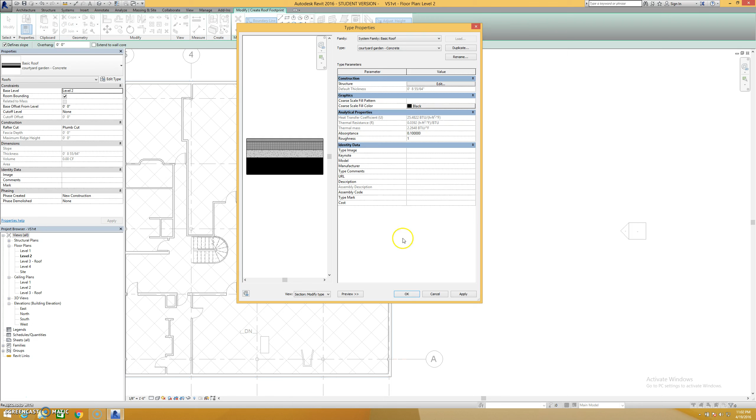We've got some analytical properties here that are in this roof, which is fantastic. And then what I'm going to do is draw in here with a sketch line, but you can also use the pick lines tool or the pick walls tool. I'm just going to do a boring rectangle here, and let's align that with my align tool.

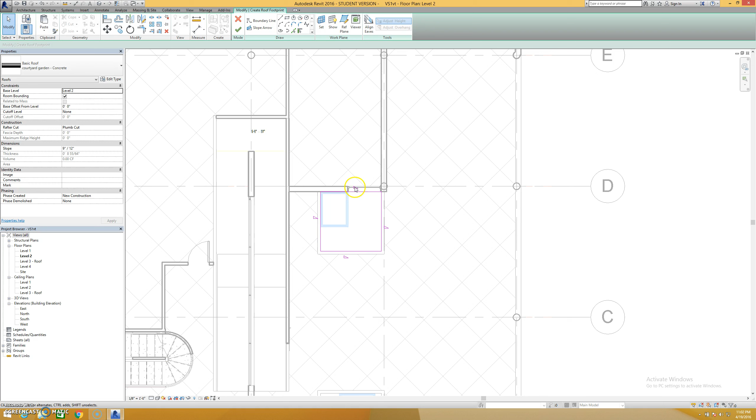Of course, you always want to pick the thing that is your datum and then pick the thing you want to align to it. So if I'm aligning something to a wall, I want to choose the wall first and then choose that object. Now you'll notice that unlike floors, when I draw these sketches, you get these little triangles on each side, and those triangles are definitions of slope.

Okay, so if I hit OK on this already, it's going to make a roof that looks kind of like a pyramid. Yeah, there it is. And we don't really want to do that. We want this to be a flat roof because there's actually a skylight that's going to go in it. You can kind of see it vaguely here in my CAD thing.

So what I'm going to do is select these lines, and when I select them, there will be an option that comes up here. Select the line itself that says define slope, and I can uncheck that box for each of these. Once I hit that, we'll go ahead and see the flat roof.

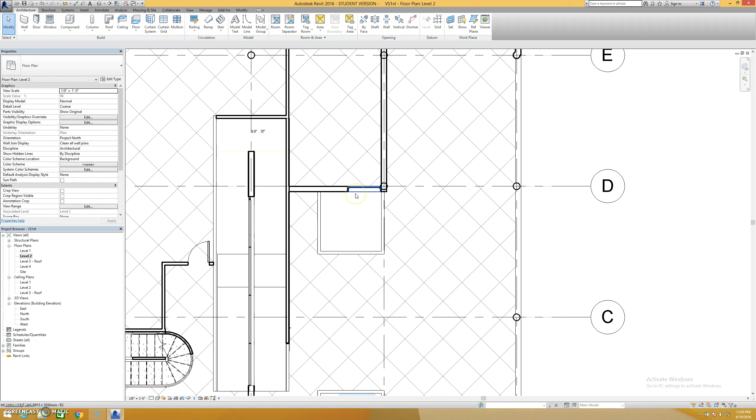Now, if I go back to my level 2 plan, the easy way to handle this at this point is to select this roof, hit CC, which is to copy it, choose a base point, move this roof down to the next area, hit edit footprint, and then I will use my align tool again to just align these pieces together. Quick way to make multiple roofs the same height. It's a very, very simple roof.

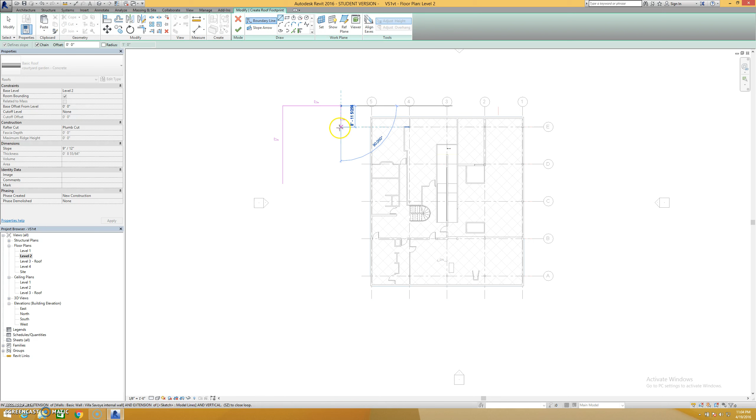Alright, so off to the side, now I'm going to do a different roof. The first thing I want to do is kind of a more complex roof, just with the roof by footprint. So I'm going to go ahead and draw a few different lines, put a jog in this, maybe something like that. This is the least realistic roof I've ever drawn, but I'm going to hit OK on this, and let me just take a look at it while we're working here.

So here is our roof. You can see it's being trimmed in this plan because the slope on it is so high that it's actually being cut off by the view range of this view. But what I can do at this point is go back in and change which items have a slope, or I can change the slope for all of these lines.

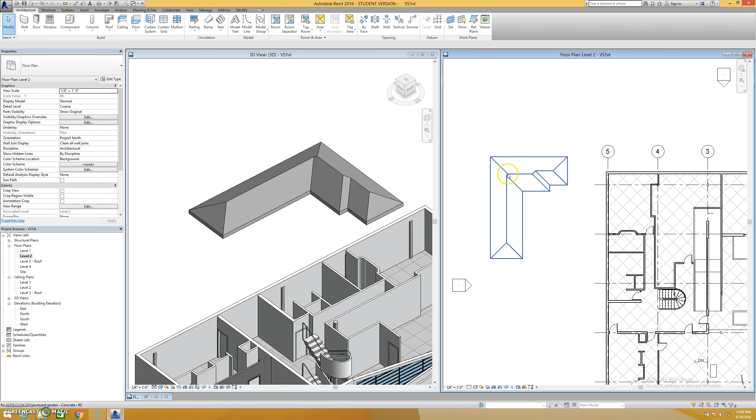So you can see here that even if I select all of them, if this is a 9:12 and I want to change this to a 6:12, for instance, I can change those all at once and get a slightly more modest slope to my roof. Now, how these roof lines are created is completely automatic, as you can tell, like where the ridge lines occur and things like that.

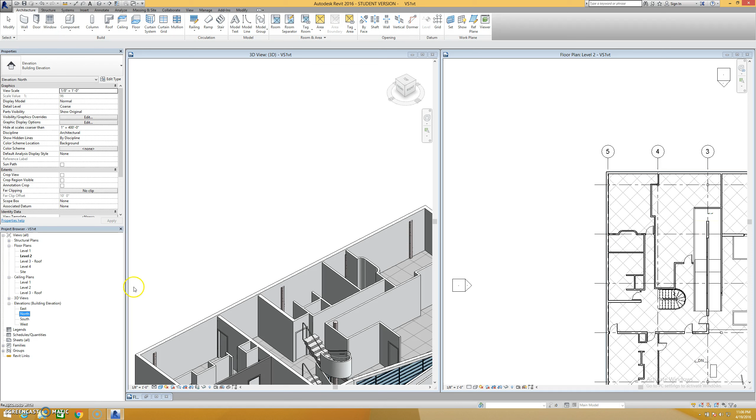So this is kind of an automatic situation. So let's go ahead and delete that one. Let's look at roof by extrusion. So in order to do this, I'm going to go ahead and look at an elevation here. So I've got some walls and things peeking up here. We got that railing, rogue railing happening over here. Ignore that for now. So let's go to roof by extrusion.

And the very first thing it's going to do is ask you to pick a work plane. Now, I should have a video that's just about work planes. But basically, this is a three-dimensional model, and if you were standing looking down at this model from the top, I'm seeing either the X or Y direction here, and I'm seeing the Z direction here as it comes up out of the ground. I can't see the directions coming out of the screen toward us, and that's

infinite. So what this work plane is asking us to do is pick a point front to back from where we sit looking at our screen back through the depth of this project. It needs somewhere to be able to start this extrusion. It can't just arbitrarily pick it. So I have the option to choose any of my grid lines here. I would obviously want to pick one that runs parallel to this view, so an ABCD grid line.

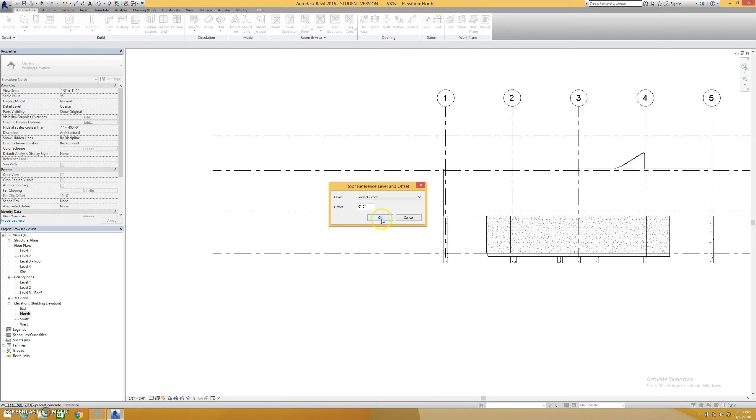The other thing I can do, if it doesn't particularly matter, or I can move the piece around later, is I can choose pick a plane. If I choose pick a plane, I can choose, for instance, the broad side. I just keep tabbing to the broad side of this wall face. And this is going to allow me to start my roof line at the very edge of where this wall starts. Now I have to choose what reference level it's going to use. So go ahead and pick 3 for fun, and then I have a sketch now. So you can see this is giving me a reference line for where my roof is supposed to begin.

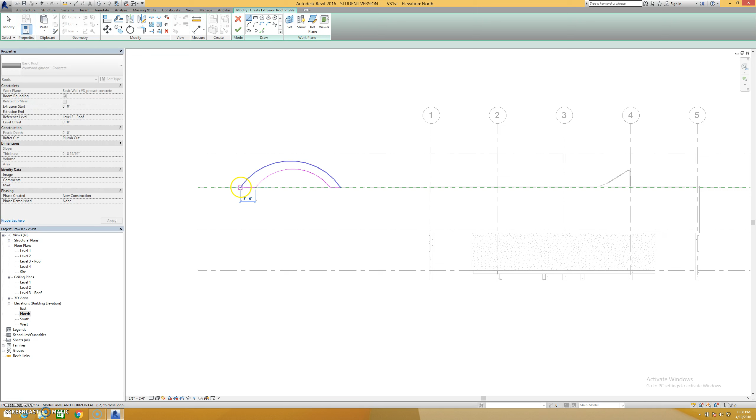And I can make a really stupid little roof here. My favorite thing when I'm teaching my class is making these absolutely ludicrous, ugly buildings, just to show the maximum level of ridiculousness. Well, it says the extrusion sketch must be open. Oh, because the roof's thickness is defined in its type. Okay, I haven't used this tool in a while, and this has changed a little bit, but this is fantastic. So essentially all you have to do is draw a line that's going to define your roof.

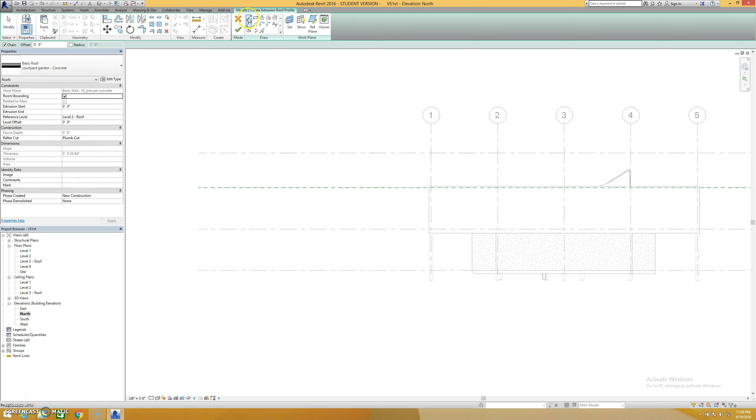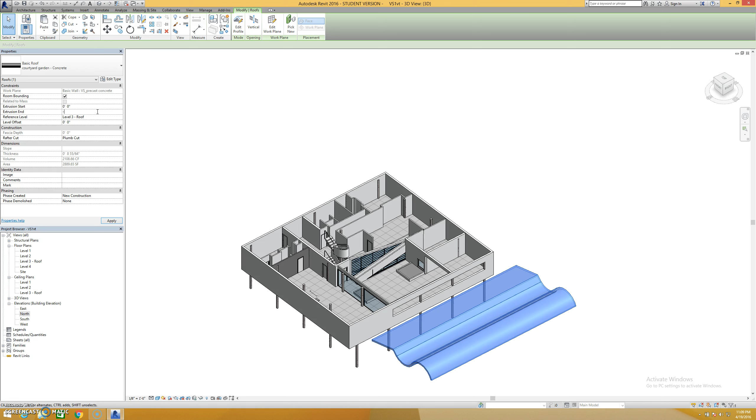So let's make it even more ridiculous. I'm going to do that. Hopefully nobody's paying for this, and then I might do something like that. Okay. Hit finish. That's going to create my roof for me. Wacky, wacky roof. There it is. Now the extrusion, the length of this is specified here. That just depends on exactly how many feet you want it to be. So let's make it 25 feet. That's going to shorten right up.

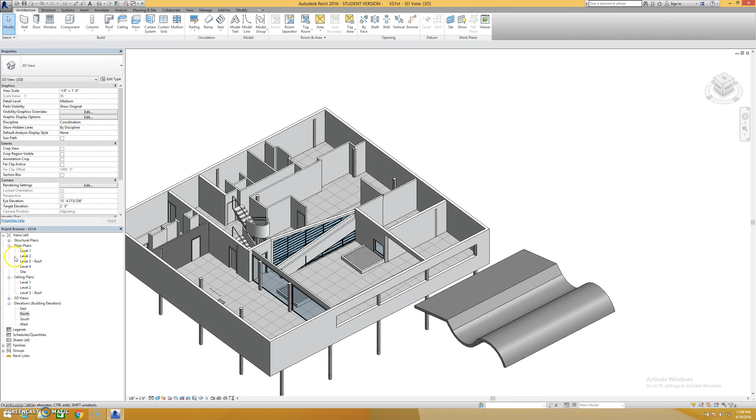You can also click on that roof, and it's got these shape handles that you can drag and move as much as you want. So that gives you a little bit more control if you've got something more specific you're doing with a roof, for instance, maybe there's a short side of a gable and a really long side that has an overhang. So that's a way to do that. And then if you have roof by face, if you've got a mass, it'll create a roof type item that's just attached to your mass.

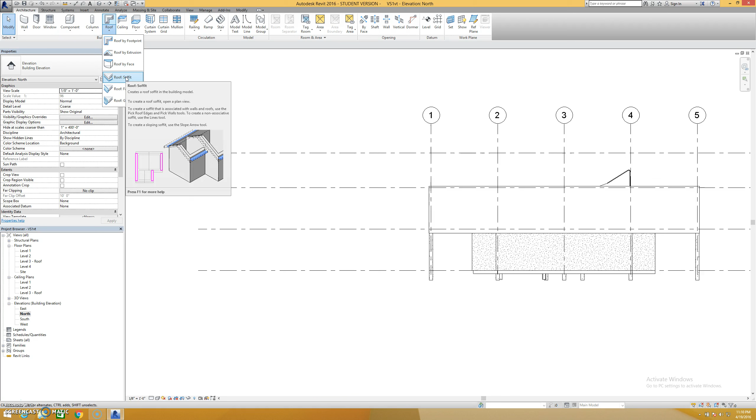I will probably do a separate video at some point, since this one's getting a little bit long, about how you do soffits, fascias, and roof gutters. But essentially, and it's pretty self-explanatory with these little sketches that pop up, once you have the roof, you can click the edges that you want to extrude these soffits, fascias, and gutter systems. These are just profiles that extrude along the edge of the roof. So that's roofs. They're pretty straightforward. Yeah, I think that's it. All right.